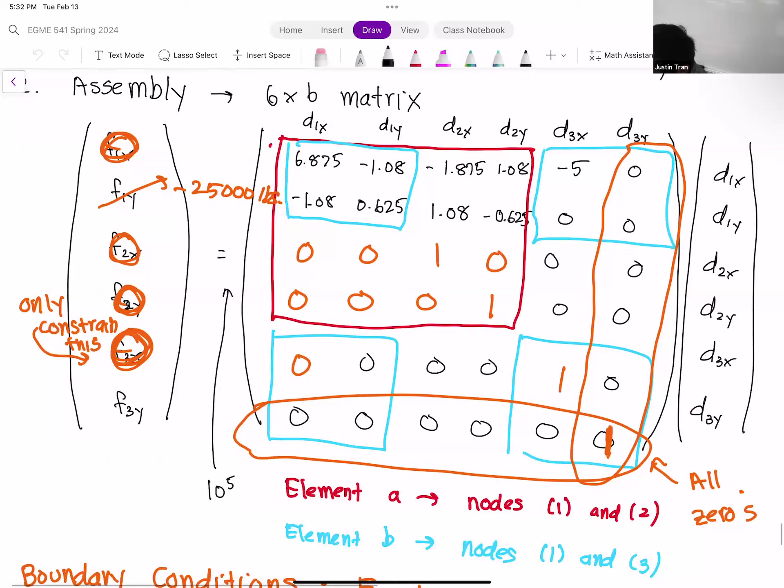Okay, so I did want to go back to the example from last time. Let me go through here, there's not much to write down, so I'm just going to jump back into the notes from last time. Let me erase this.

Okay, so last time we were doing this example here. We have the structure—it's just a 2-bar structure where we had one element angled up at a 30-degree angle and another element that's horizontal.

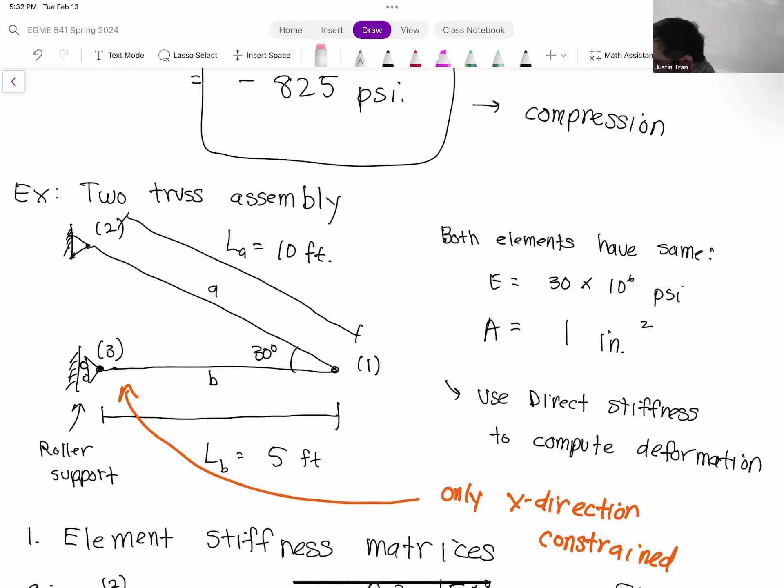I used this example for a couple of reasons. The first was to start a discussion on the conventions for the angles. Even though the angle given in the problem is 30 degrees, that's not the angle we actually plug into the element stiffness matrix a lot of the time. The angle you have to plug in is the one the element makes with the positive x-axis. So make sure you're computing your angles correctly.

The other reason I brought up this example was the global stiffness system. After you assemble all the element stiffness matrices and apply the boundary conditions, what can happen sometimes, not often, is that you get a row that's entirely zeros and the corresponding column is entirely zeros as well. Let me highlight it again so you can see—this entire last row here is zeros, and this column is all zeros as well.

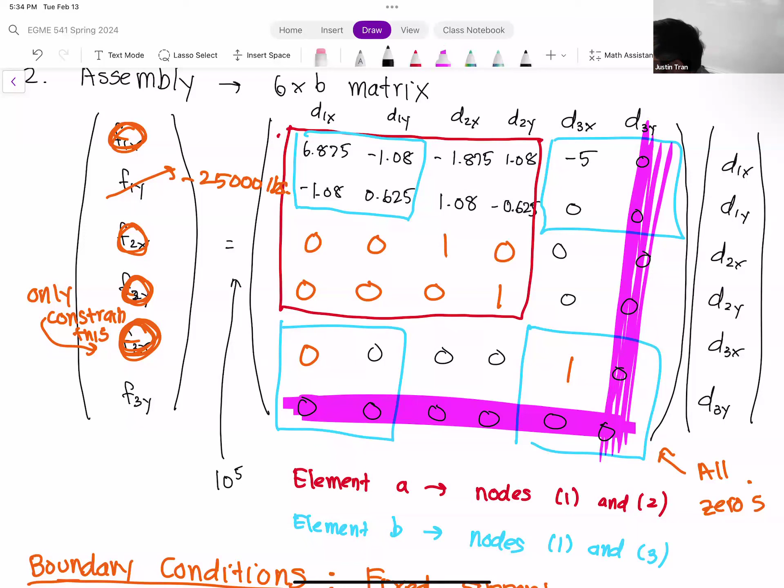So this is a singularity, and what this basically means is that our structure is not stable. A few people have actually noticed this as well. If you actually had this structure in reality, with a fixed pin up here but this one being a roller, and if you pull down on this—apply a force on the end, or even without a force, just let it fall through its own weight—

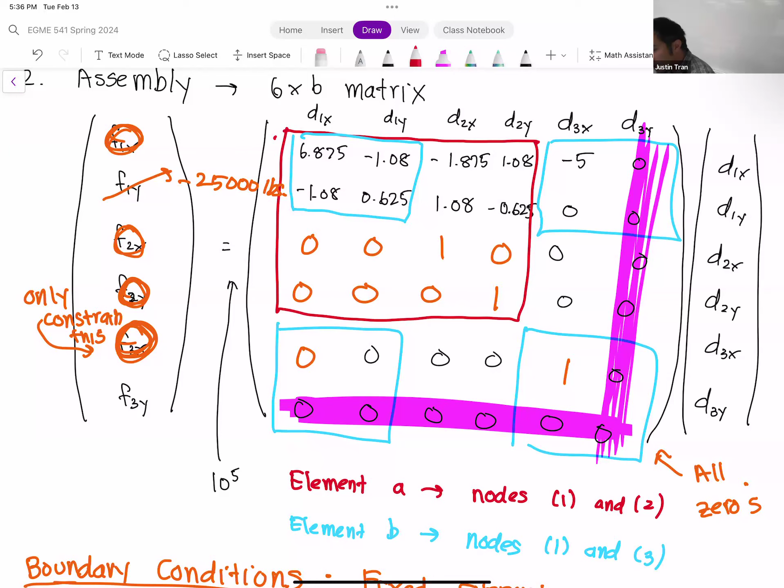The way you do that is you can transform one of these supports from a roller support to a fixed support. To do that—sorry, I have too many colors going on, it's hard to see—to artificially constrain the structure more, you would basically change that last row, that last diagonal entry, to be a 1. By changing this to a 1 here, we are artificially constraining the structure.

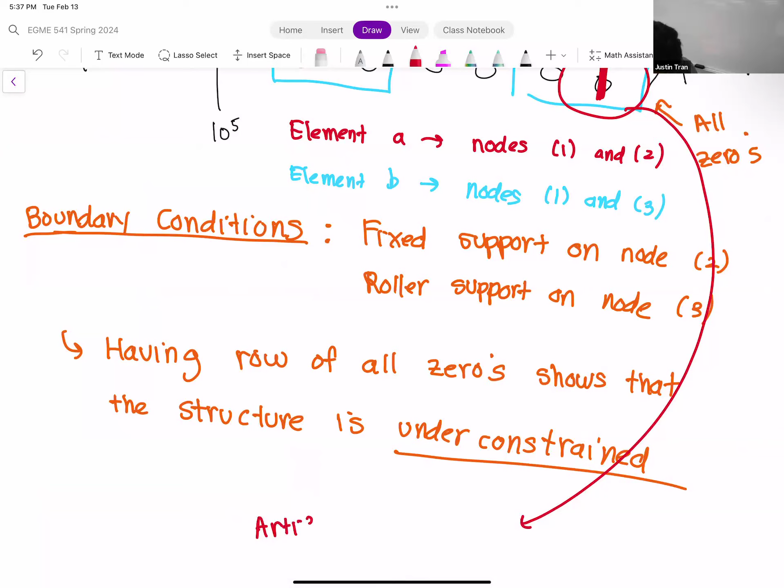Right, so that's what you would have to do. So only by doing that can you actually solve this system for the deformation in this case.

But the reason I bring this up is that this is actually quite a common problem in FEA in general. And so when you're using ANSYS or when you're using any kind of commercial software, your software is going to be checking for if you have enough constraints on the structure. And it's not that uncommon for you to have a situation where you under-constrain your simulation as well.

Question: so F3Y will be 0? Yes, F3Y will also be 0.

And so you're going to be in a situation where you also need to put additional constraints on your structure in order for your simulation to run. And so the way ANSYS basically tells you this is that it will give you something called a solver pivot warning. That's basically your indication that you need to add more constraints to the structure.

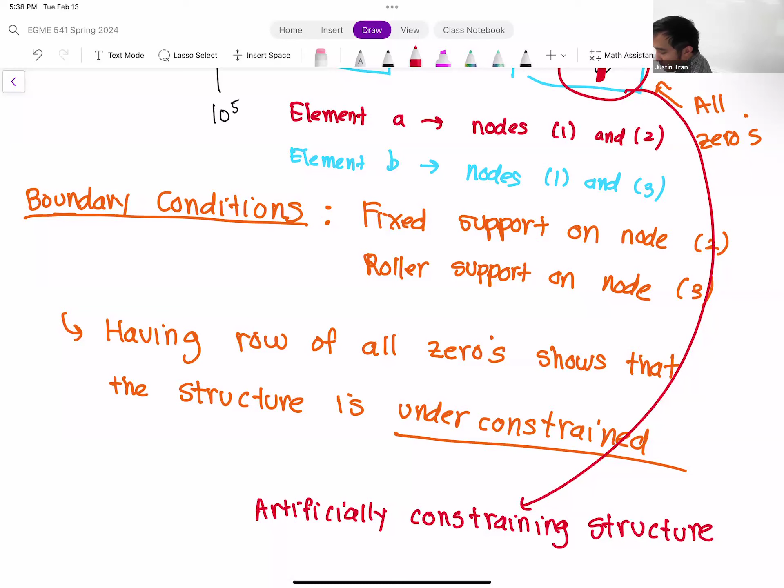And mathematically, this is essentially why. The reason ANSYS gives you that error is because it's creating a linear system here, and it's not able to solve for a solution because it either has a row or there's multiple rows of all zeros, and it's not able to invert the matrix to give you your solution.

So you either need to go back to your original geometry and try to come up with where it makes sense to add a fixed constraint or to add more constraints. Or is there something else wrong? Is there some other issue with the boundary conditions that I need to address?

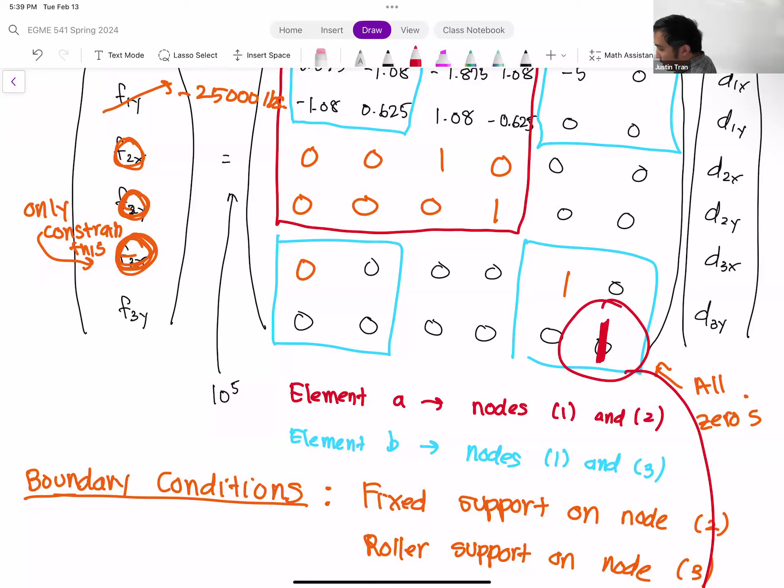And so there's not really a fix-all kind of solution to that. It's really kind of situation dependent, but this does happen quite often in FEA, and this is kind of the mathematical reason why it does that.

So I wanted to bring that up. I'm going to try not to give you any more problems like this on the homework where you have to artificially constrain it. But in situations like that, that's essentially what you have to do. Any questions on this?

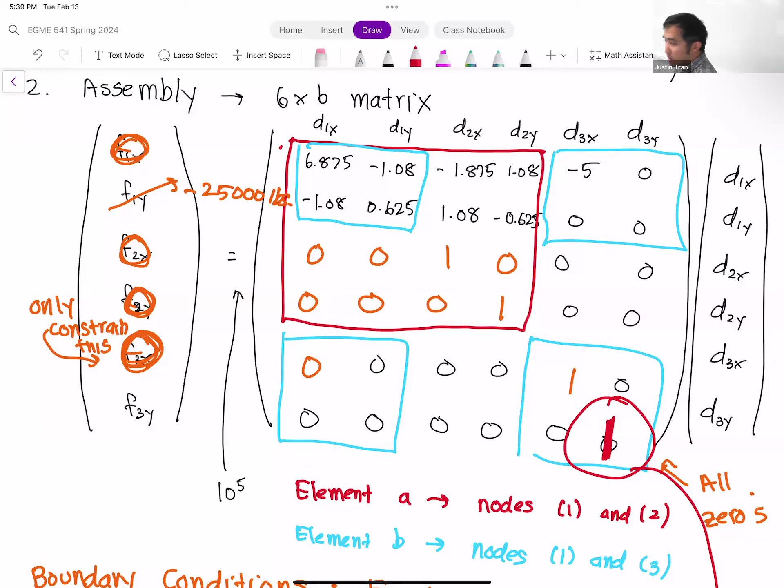Okay, all right. So let's jump to beams then.

And so we're going to talk about the application of beam elements in the direct stiffness method. So in a nutshell, beam elements are structural elements that are able to support transverse and rotational deformations.

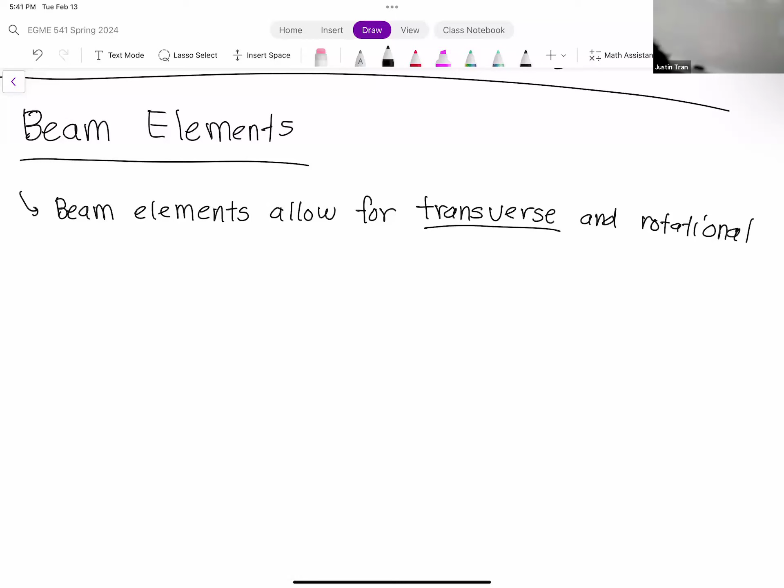So what do I mean by transverse and rotational deformations? Let me go ahead and draw a beam element for you here. In a lot of ways, a beam element is kind of opposite of a truss bar. A truss bar, if you remember correctly, is only capable of axial deformations.

Those are deformations that are parallel to the element itself. Beam elements allow for deformations in basically every other direction, so transverse deformations. Let me call this D1Y and D2Y. Transverse deformations are deformations that are in the direction perpendicular to the element.

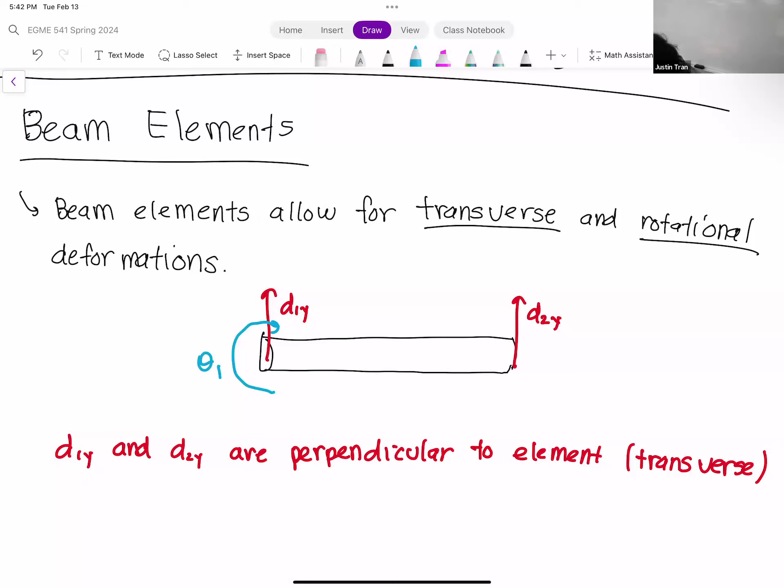So any kind of bending that's associated with an element comes from transverse deformations. On the flip side, rotational deformations we usually indicate with an angle: θ1 and θ2. These are the rotational degrees of freedom, and what they indicate is a change of orientation or change of slope of the element at those locations.

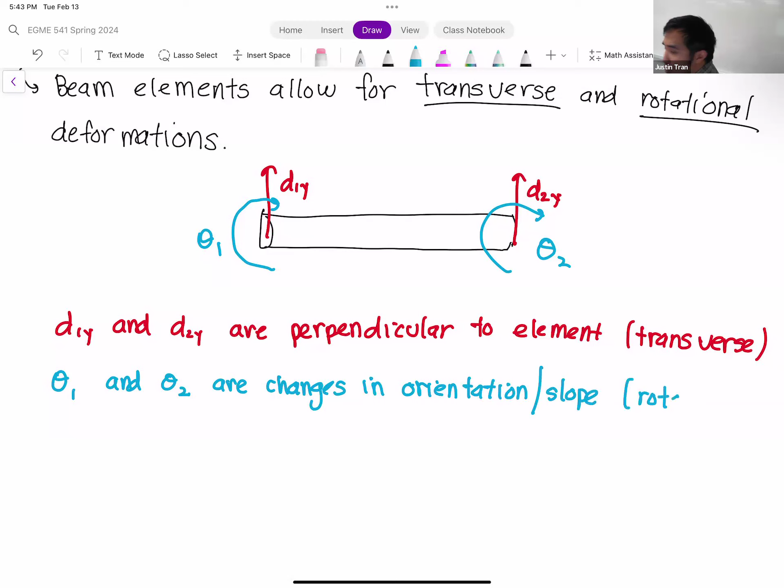So we are now going to be adding these two modes of deformation to our direct stiffness approach. So in contrast...

Truss elements only allow for axial deformation. So beams are basically everything else.

All right, so with the introduction of beams, this kind of opens up our repertoire quite a bit in terms of the types of structures that we can analyze. Because with truss structures, for the most part, we're mostly limited to kind of triangular structures, because the structure has to be arranged in a certain way where most of the forces and most of the deformation is going to be down the barrel of the element.

But now that we're introducing transverse deformations and rotational deformations, this opens up the possibilities of the type of structures we can actually do. But it also brings with it a completely different element stiffness matrix.

Okay, so that's going to be the focus of this week: what's the element stiffness matrix for these beams? How do we incorporate that into our direct stiffness method, and then do a few examples to hammer that home. All right, any questions on this so far?

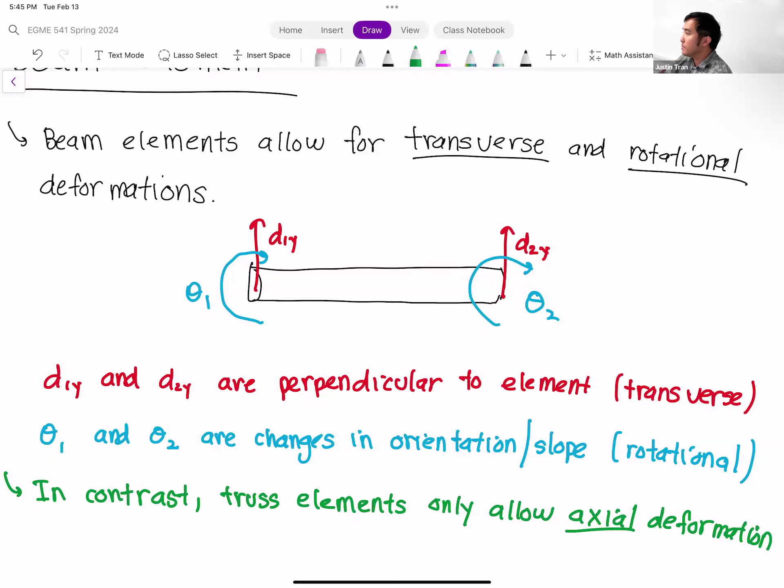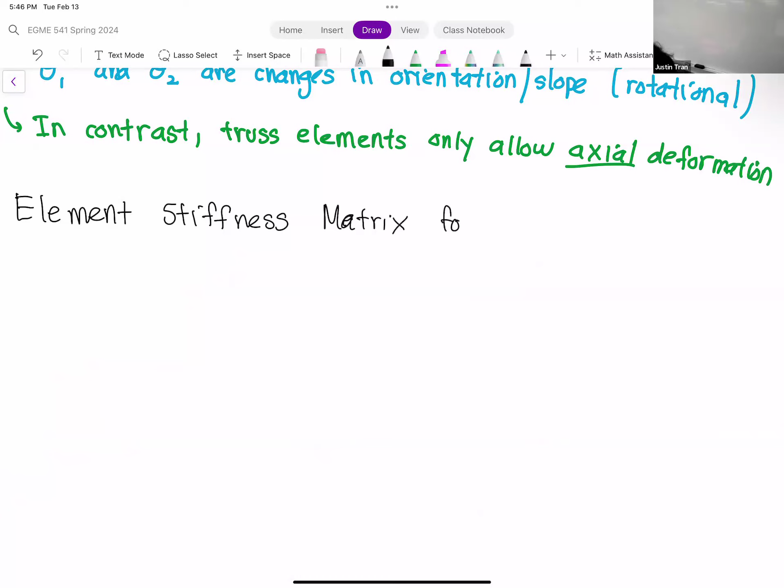Okay. All right. So let's take a look at the element stiffness matrix for a beam.

All right, so first thing I'll note here is that because for a beam we're considering both transverse and rotational deformations for two nodes in a beam, that means we're going to have 4 degrees of freedom per beam element. So that is D1Y, theta 1, D2Y, and theta 2. And so what that means for our element stiffness matrix is that it's going to be 4 by 4.

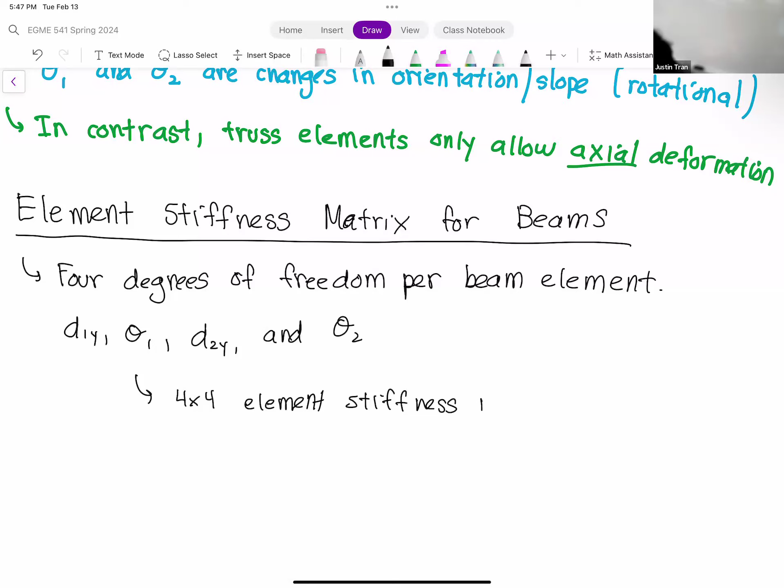All right, so in particular it's going to look like this. On one hand you're going to have the forces, so you're going to have Fy1. For the rotational degrees of freedom, instead of a force we're going to have a torque, or a moment, so it's going to be M1. So our forcing vector looks like Fy1, M1, Fy2, M2. This is going to be equal to our element stiffness matrix, which is yet to be determined, times dy1, theta 1, dy2, theta 2.

All right, question: don't we consider axial deformation in beams? So for now we're going to ignore the axial deformation. We are going to bring it back - the next topic after this is going to be frame elements, and frame elements will consider axial deformation, transverse deformation, and rotational deformation all at once. But those problems are massive, because with that you'll have 6 degrees of freedom per element, and your element stiffness matrix is going to be 6 by 6, so it gets quite nasty. But for now we're going to ignore the axial deformations.

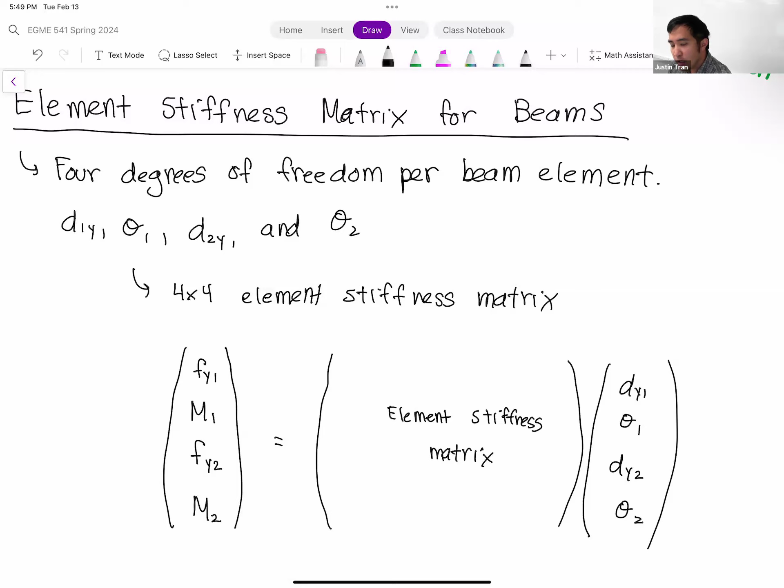Okay, so now the question is, what are we going to put inside this element stiffness matrix?

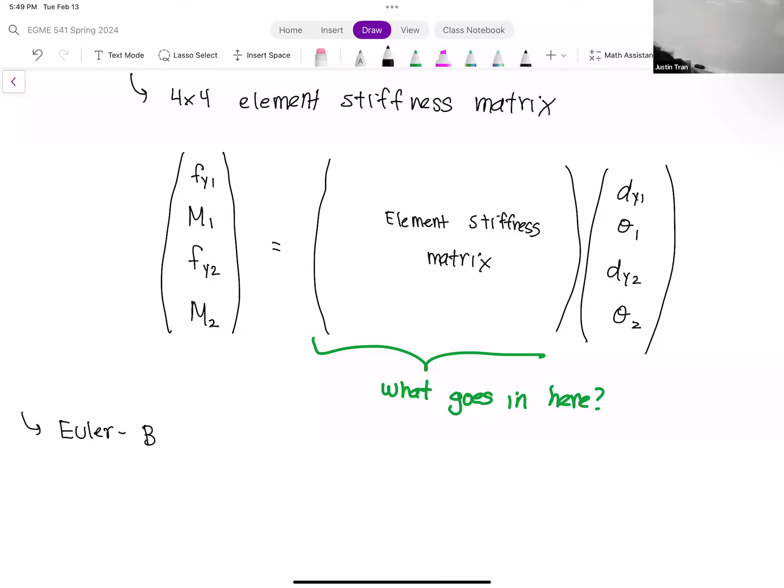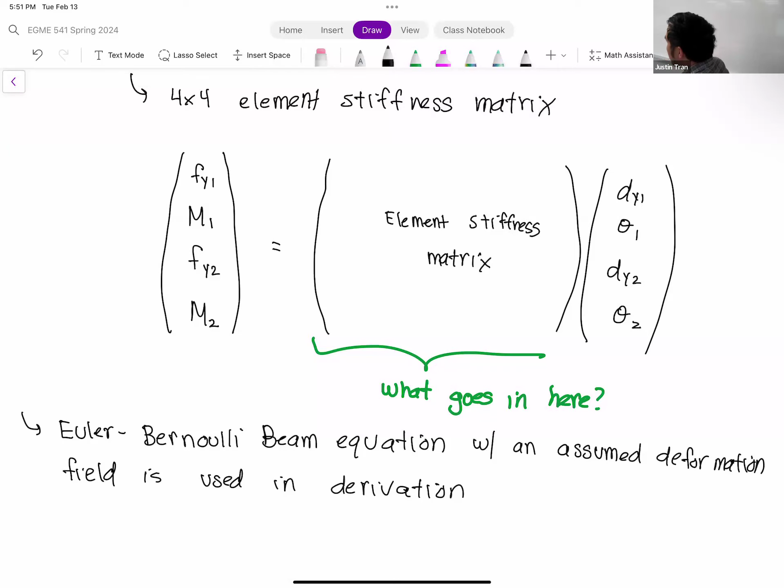All right, this is something I'm going to largely skip, so I'm not going to give you the full details of this derivation. It is in the lecture notes, so if you're interested you can check it out there. But in a nutshell, we're basically going to be using the Euler-Bernoulli beam equation. So what we do is apply it onto a beam element with two nodes, with a certain deformation field. If you apply that and go through the derivation, that will give you your element stiffness matrix. The nature of this derivation is a little different than how we derive the element stiffness matrix for a spring and for a truss - this one actually utilizes the differential equation for a beam quite a bit. But just for the sake of time, I want to make sure I get to some examples today, so I'm going to largely skip it, and just give it to you.

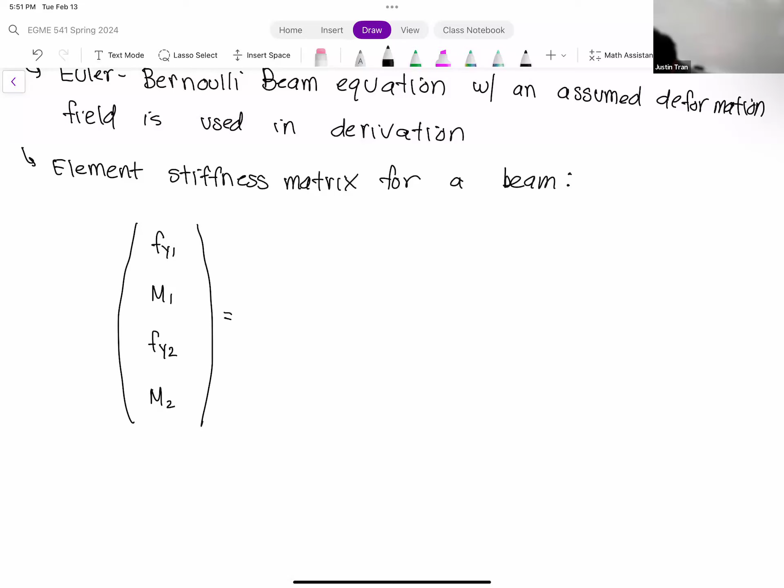And so the element stiffness matrix for a beam looks like the following: Fy1, M1, Fy2, M2 is equal to - in front here we have a factor that multiplies the whole thing, so we have EI over L cubed. This is multiplied by a 4x4 matrix, and so this is going to be 12, 6L, minus 12, 6L. That's the first row in the matrix.

So our same rules from before actually apply here too. All element stiffness matrices are symmetric. So as soon as you write the first row, you can take that first row and write it into the first column as well. Let me go ahead and do that.

So our first column here is going to be 12 up top, then 6L, minus 12, and 6L. Next row, we already have the first entry, which is 6L. The diagonal entry is 4L squared, and minus 6L, 2L squared.

Let me do the same thing and write those entries into the second column. All right, in the third row here, we have a 12, minus 6L. Once again, we're gonna rotate that down, so we have a minus 6L in the fourth row in the third column. And then the very last entry is gonna be 4L squared.

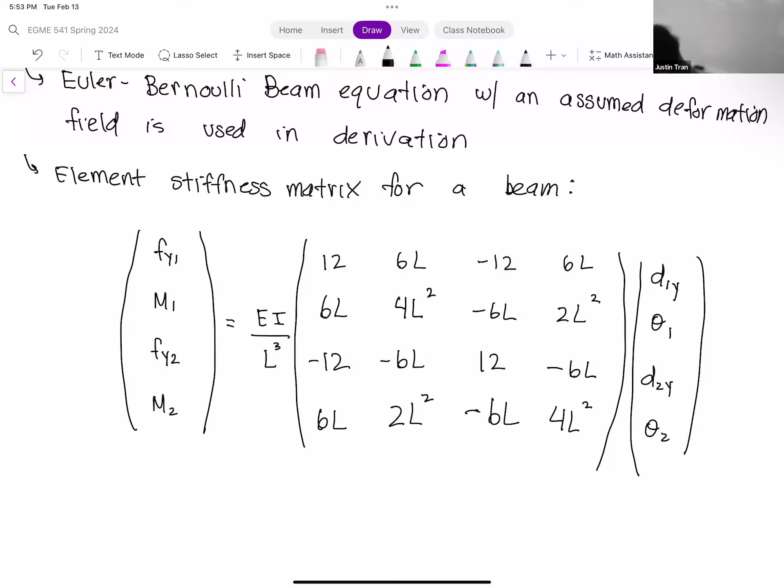And of course, this is multiplied by the deformation vector d1y, theta 1, d2y, theta 2. So that's the element stiffness matrix for a beam. Any questions on this so far?

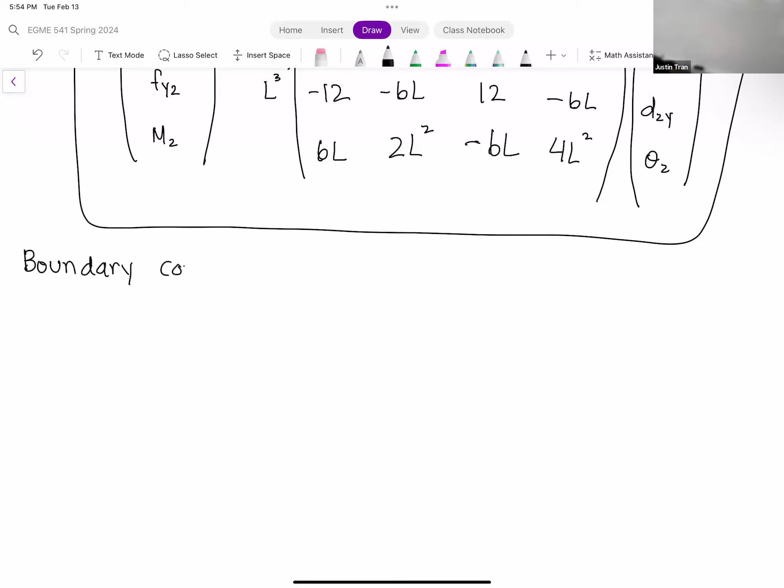Okay, so before we jump into an example, let's talk about constraints a little bit more, or boundary conditions. With the last example that we did with trusses, we were introduced to the concept of a roller support versus a pin support. We're going to expand on that a little bit more because now we have a rotational degree of freedom. We need to talk about how the different constraints affect that rotational degree of freedom, as well as the translational ones. So there are three types of constraints.

And honestly, the difference between some of these is not going to be relevant until we get to frame elements, which is the next thing.

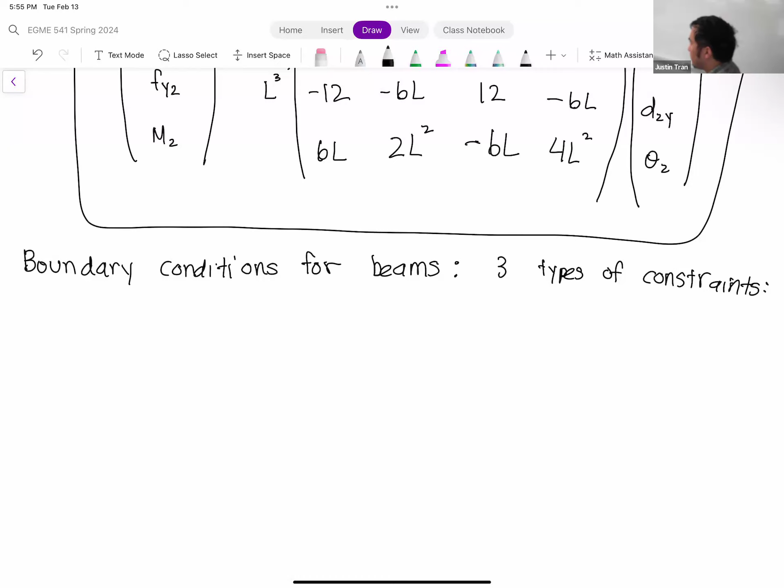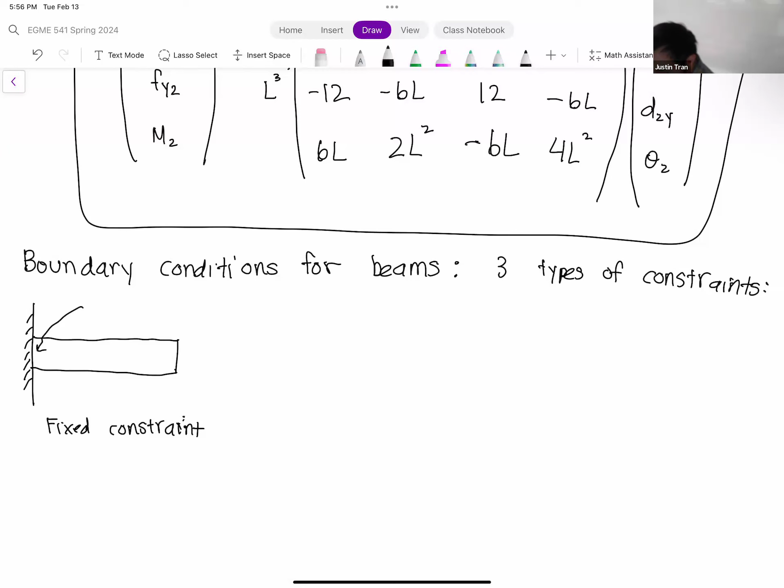All right, so the first type of support that we have here is called a fixed support, or fixed constraint. Visually, what it looks like is that you have a beam, and that's literally kind of just stuck inside a wall, right? And so you have a wall that's basically attached to that. So the fixed constraint refers to this end right here on the left. We have the beam kind of stuck inside the wall. And so this is the most powerful type of constraint, and so all degrees of freedom are constrained here. So we have dx is equal to 0, dy is equal to 0, as well as theta is equal to 0 as well. So it allows no degrees of translation and no degree of rotation.

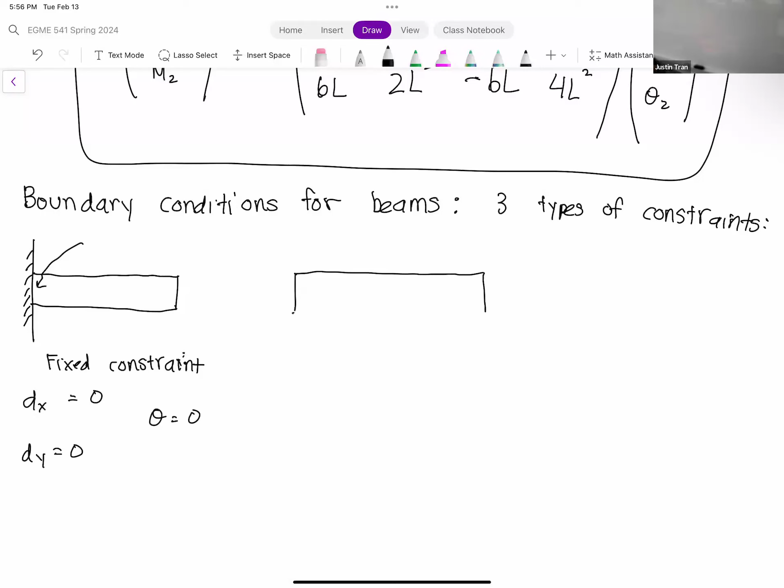All right, so next is the constraint that we've been mostly using in our truss problems. I think in the past I've called this a fixed constraint. Well, for trusses, it effectively is a fixed constraint. But I want to make the distinction between this and a true fixed constraint, which is on the left. So whenever you have that little triangle symbol and that triangle is kind of directly attached to the element, and that triangle is kind of fixed to the ground, this is something called a pin constraint.

And so a pin constraint is going to constrain the displacement. So we're going to have dx equal to dy equal to 0. But the pin constraint is not going to constrain any of the rotations. We're going to have theta be free here. So at a pin constraint, the structure is free to rotate however it pleases.

Okay, and so the last type of constraint, this is the one that we talked about last time, is a roller. And so a roller constraint visually looks like this. It's going to basically look like a roller skate, basically a constraint with wheels, and the wheels are going to be on a wall or something like that.

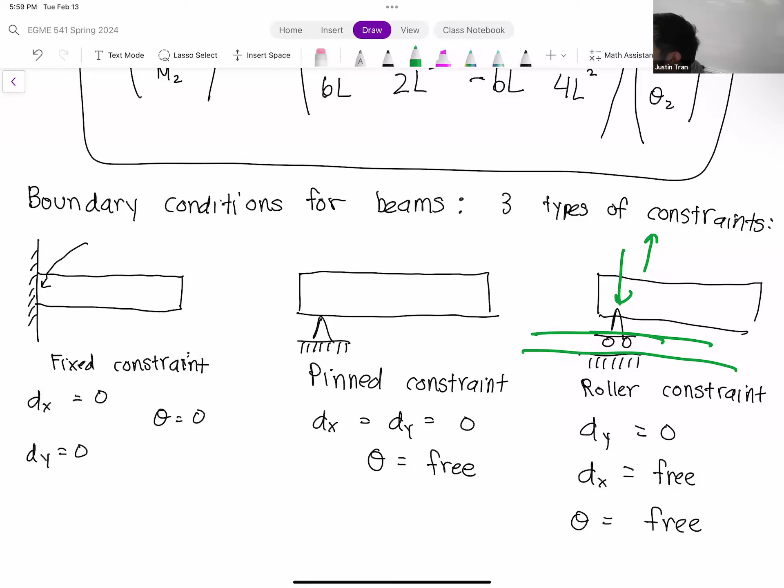Shouldn't that make the angle 0 also? No, it's free to rotate as well because the beam here is still pinned right here. And so the beam is free to kind of rotate up and down this way. The track is only there just to prevent any kind of y deformation.

All right, any other questions on this? Okay, so this will become a lot more relevant when we do frame elements, but I thought this would be a good chance to introduce this here.

Okay, so let's do a fairly simple example, just to kind of see how all of this kind of fits together. Okay, so let's consider this 2-element beam.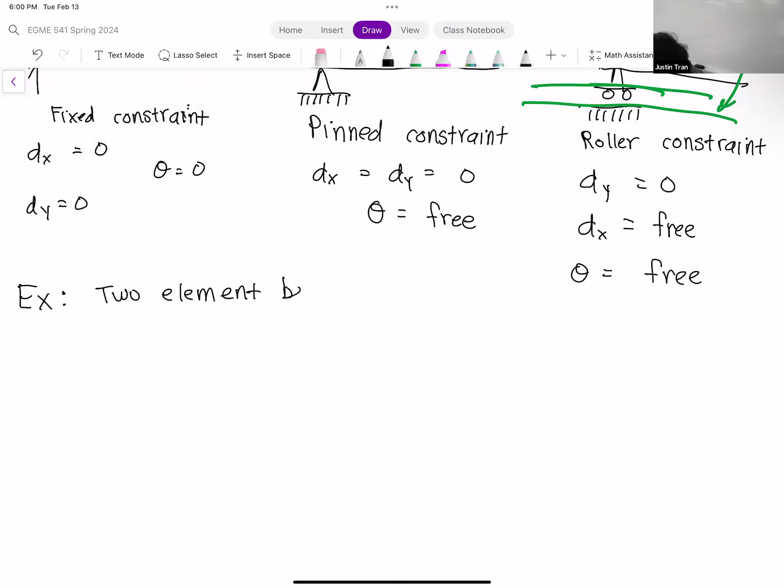All right, so on one end we're going to have a fixed support, and on the other end we're going to have a pin support. Okay, so we'll call this element A, we'll call this one element B. You have node 1 attached to the wall, node 2 in the middle between the two elements, and node 3 that's on the end.

All right, so we're going to do this one purely symbolically. I'm not going to give you any numbers for this, but it's just to kind of show you how all the matrices are set up.

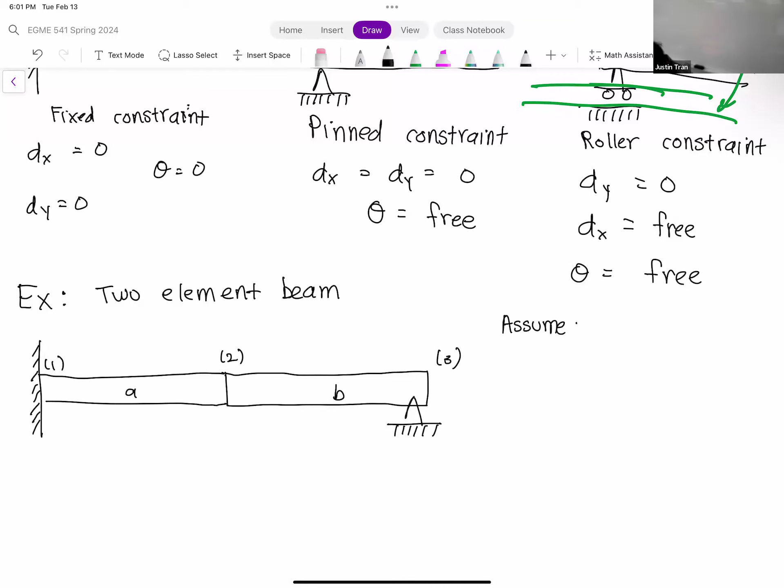All right, so let's assume that E and I are constant throughout. So we don't change any material and we don't change the cross-sectional area, the cross-sectional shape.

I wrote something down, I promise. It's the iPad that's crapping out.

Okay, I should have mentioned this earlier, but I always forget to do that every year. In the element stiffness matrix for a beam, the capital I that's there is the moment of inertia, the moment of inertia of the beam cross section. So we have E and I constant throughout the beam, and we're going to consider these as pure beam elements. And so we're going to ignore any axial deformation.

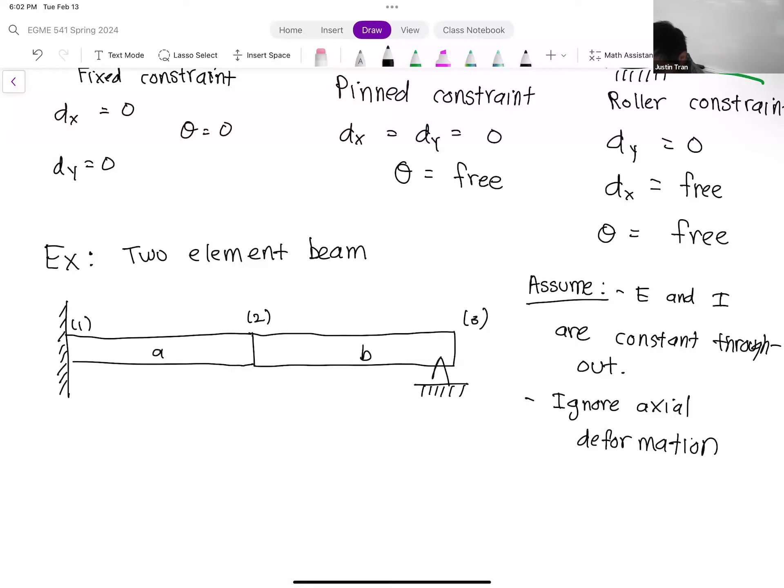All right, so let's talk loads. And so we have two loads being applied here.

So we have a downward load, a downward force of P being applied on node 2. And we also have a counterclockwise moment, or counterclockwise torque, of M being applied on node 2 as well.

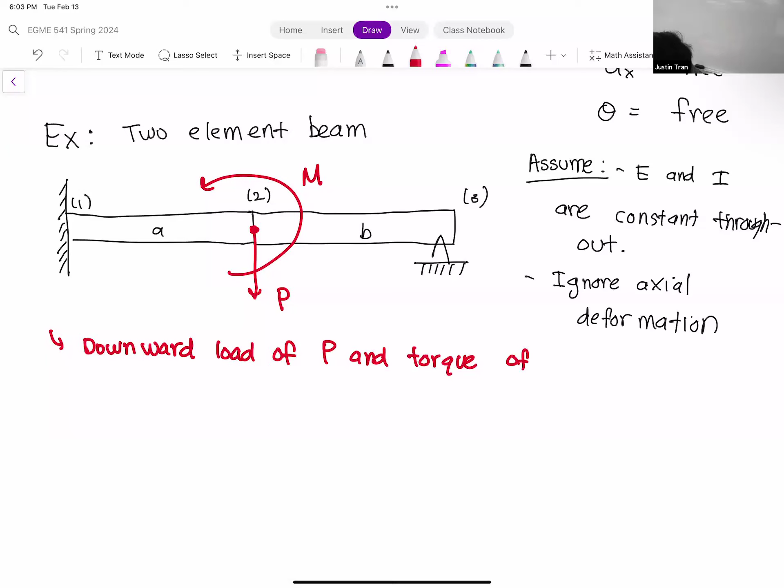Okay, so in this case we're not given any numbers, we're just going to do this all symbolically. And so for this one, all we're going to do is assemble the global linear system and apply boundary conditions.

All right, so it's a pretty straightforward direct stiffness problem. We only have two elements here, so we're just going to run through the motions pretty quickly. Any questions on just the setup for the problem?

Okay, all right, so let's go ahead and go through it. All right, so the first thing we need to do as part of the direct stiffness method is to write out the element stiffness matrices.

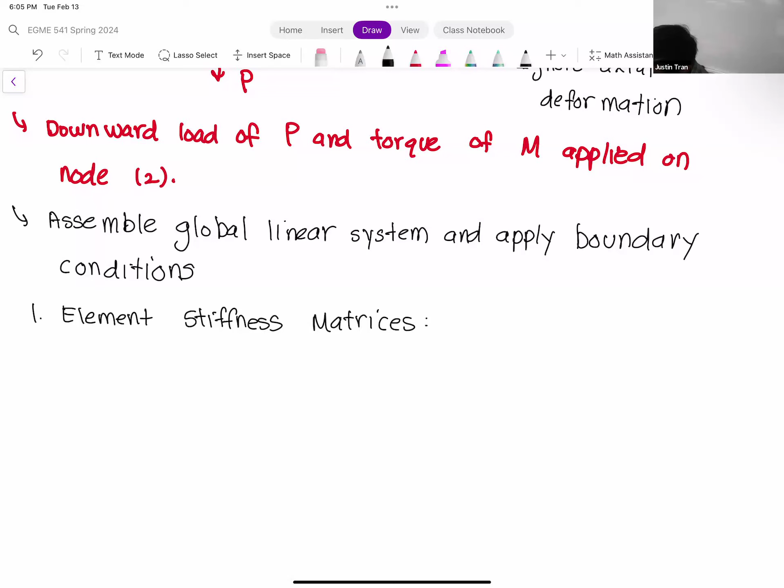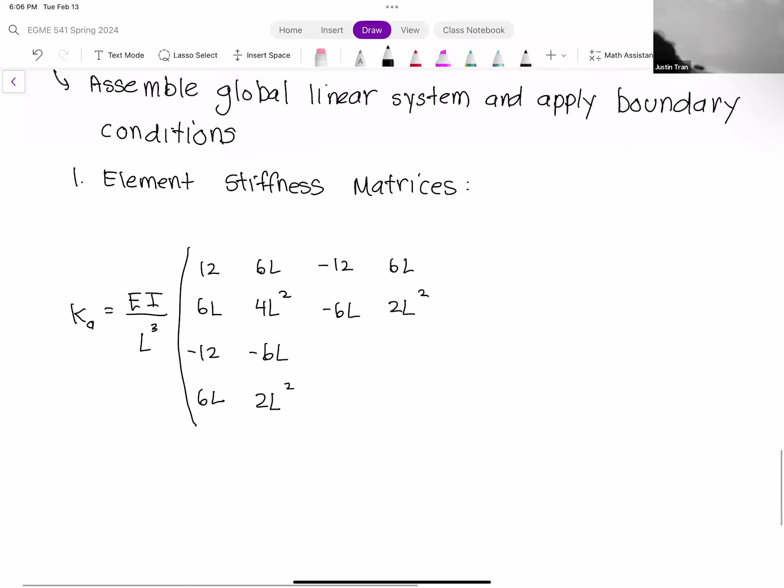All right, so we have the element stiffness matrix for element A. Since we're not given any numbers and we're given all of the properties here symbolically, I'm just going to write it down here. So for Ka, we have EI over L cubed multiplied by 12, 6L, minus 12, 6L — write that into the column — 4L squared, and then third row you have minus 12, minus 6L. And since element A here is connected to nodes 1 and 2, we have D1y, theta 1, D2y, and theta 2.

Okay, now we have element B. So element B, we have the same thing. So we have EI over L cubed — its properties are identical to element A, so we're just going to copy this straight over.

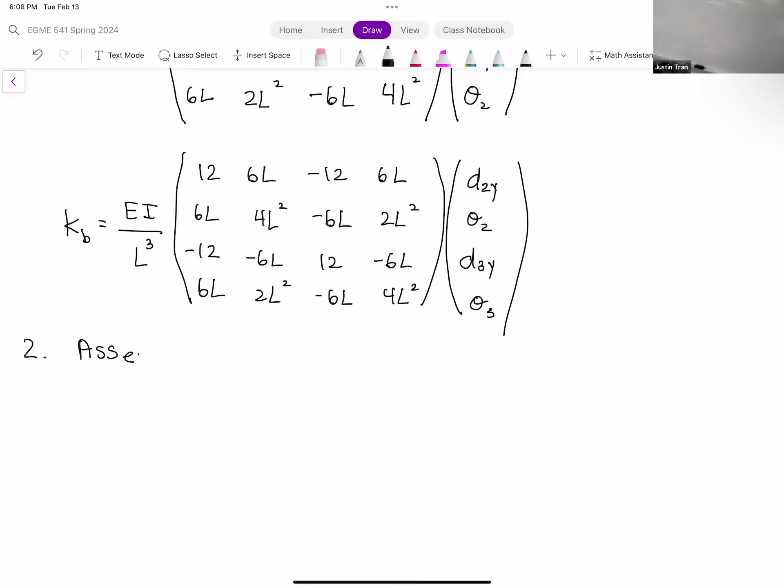Okay, so now that we've written out the element stiffness matrices, the next step is to assemble. So let's go ahead and do that.

Since we have 3 nodes here and each node has 2 degrees of freedom, that means our global stiffness system is going to be 6 by 6. So let me write in the forcing vector first, since we have F1y, M1, F2y, M2, F3y, and M3.

Let me add in our factor in front here, so we have the EI over L cubed. All right, so now we need 6 columns here. So we have a D1Y column, theta 1, D2Y, theta 2, D3Y, theta 3.

All right, so this one's pretty straightforward. We're just gonna enter these in here, right? All of these elements are contiguous with each other. So this is gonna be element A.

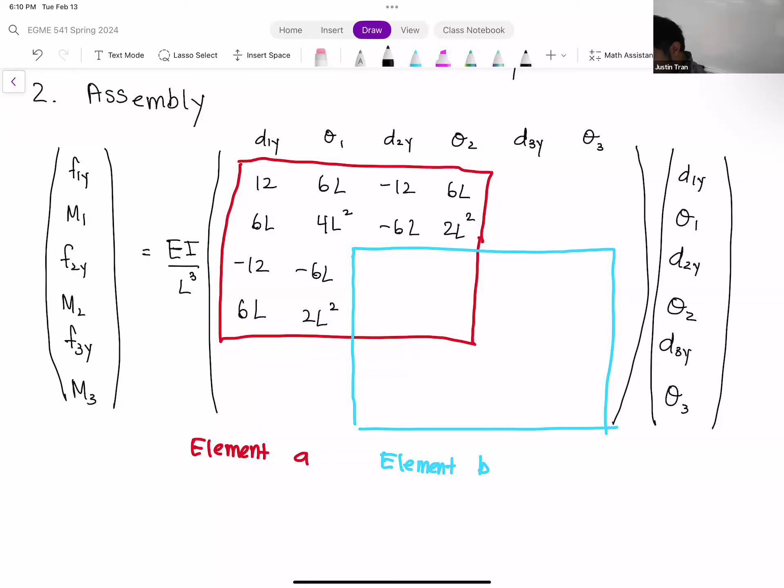All right, now we have the overlap region. We're going to have some things cancel out and some things add together. So we can have a 24, 0, 0, and then 8L squared. That's what you get when you overlap the bottom right-hand corner of the stiffness matrix with the upper left-hand corner of the other one. And then everything else here is going to be the same as up there. So you have minus 12, 6L.

Okay, and then of course, everything that's not in a box, we're just going to put a 0 there. As always, there's a lot to write down, but as you start to do more of these, you kind of start to get into a rhythm of doing these things.

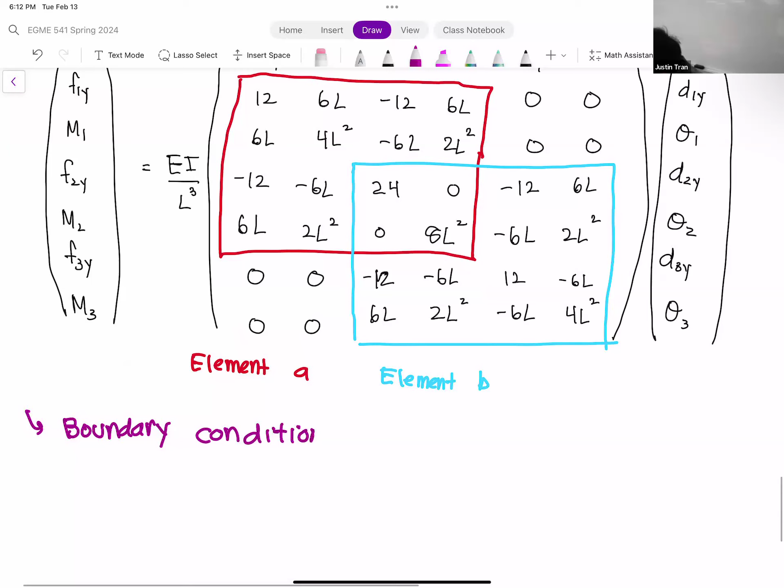All right, so everything we've done up to this point has been pretty standard. That's just our standard direct stiffness method. The only caveat, of course, is that we're using beam elements now, so with the different element stiffness matrix. Here's where the wrinkle gets a little bit interesting. So let's add our boundary conditions here.

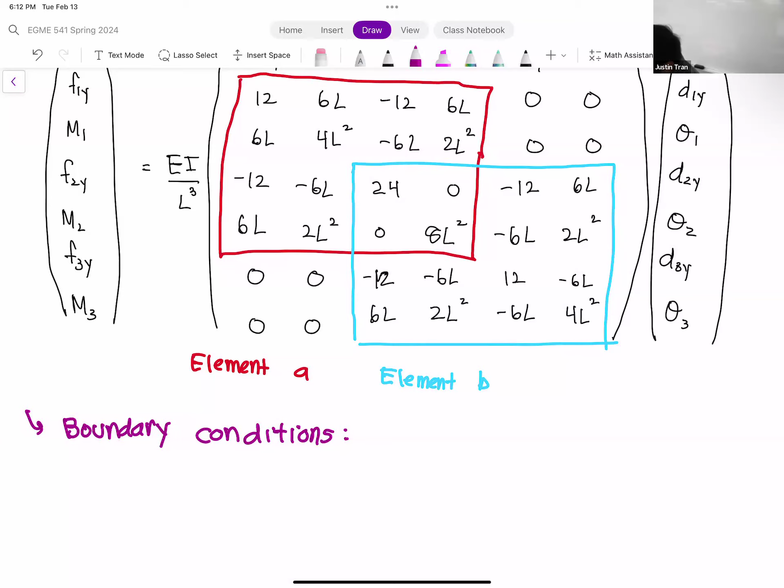All right, so if we go back to the diagram for this problem, we can see from the diagram here that we have a fixed support on node 1, whereas on the right, we have a pin constraint on node 3.

So what does this mean? That means the degrees- so let's look back at our cheat sheet here in terms of how this affects our degrees of freedom, right? Remember, we're only considering beam deformation, so we're only considering transverse deformation and rotation.

Okay, so on the left-hand side for the fixed constraint, this is pretty easy. A fixed constraint is going to eliminate absolutely everything. So this means that d1y and theta 1 are both 0.

Whereas for the pin constraint, it's gonna restrict the deformations. We have d3y, and d3y is gonna be 0, but theta 3 is gonna be free. Remember, what free basically means is that we're gonna leave that entry in, we're gonna leave that row in the matrix unloaded, so we're not gonna make any changes there. But we are gonna make changes to the d3 row, and we're gonna make changes to the d1y and theta 1 row.

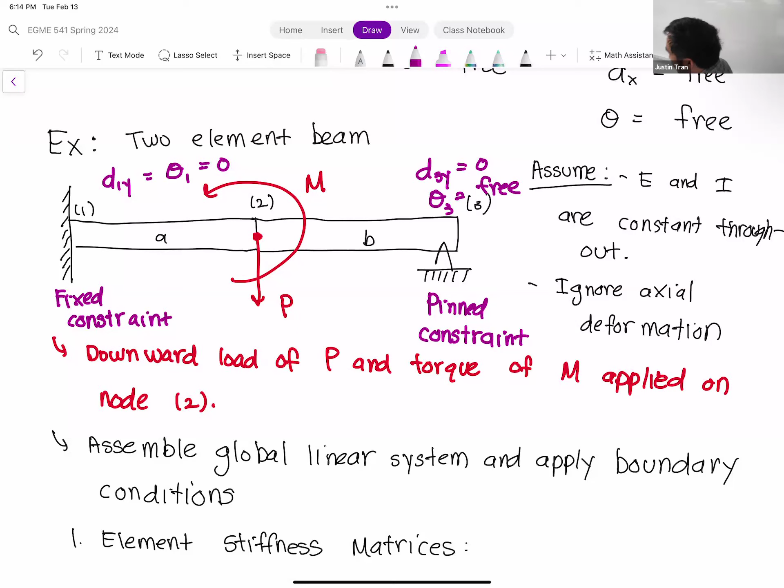Okay, so let's go ahead and make those changes to our matrix here. So first, let's apply the fixed constraint on node 1. That means this entire row, the first row, needs to be changed. The second row, which corresponds to theta 1, also needs to be changed.

Okay, so let me go ahead and do that right now. Remember, for constraints, we change every entry in the row to zeros except for the diagonal. So for the first row, it's going to be 1, 0, 0, 0, 0, 0. And for the second row, we're going to put the 1 on the second column, so we have 0, 1, 0, 0, 0, 0. And then similarly, we're going to put zeros out here, so F1y is 0 and M1 is 0 as well.

Okay, now let's do the pin constraint on node 3. Pin constraint means that d3y is going to be 0, so we need to change this entire row. But theta 3 is going to be free, so the very last row in the matrix, we're actually going to leave alone. We're not going to make any changes to that row.

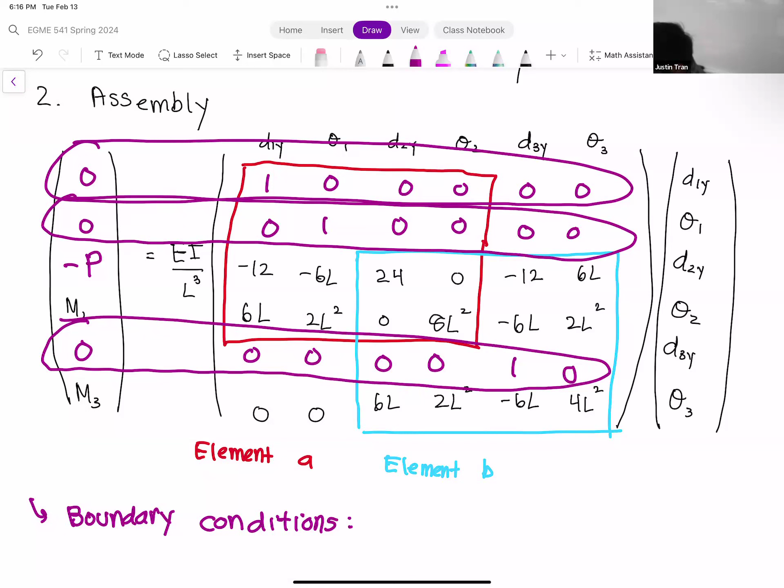Okay, now let's apply the forces. We have a force of P being applied on node 2 in the downward direction, so that means F2y is going to be minus P. And we also have a counterclockwise moment of M being applied on node 2 as well, so that means M2 we're going to replace with M.

And of course, the last thing we have to fill in here is M3. M3 is just any kind of rotational load or torque or moment being applied on node 3. We don't have any of that, so we're just going to turn this M3 into a 0.

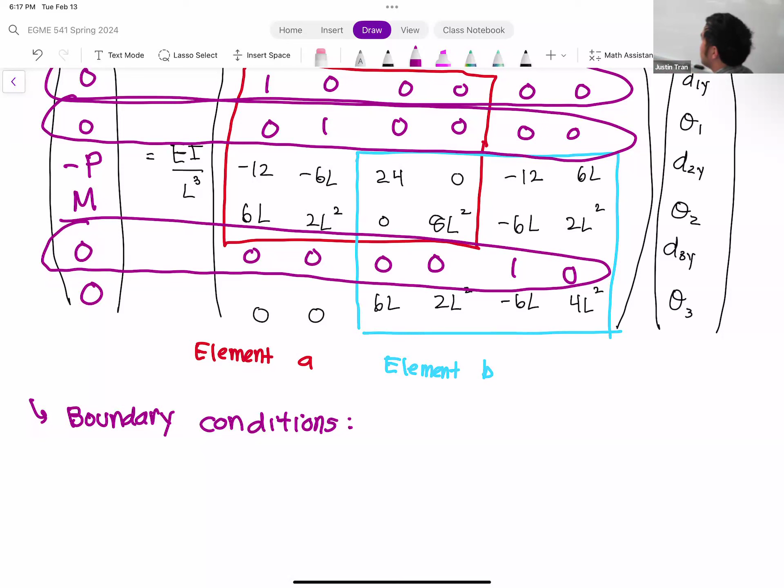All right, so that's beams, and there's really not much to it. You have to change your frame of reference a little bit because the deformations are in different directions, so our element stiffness matrix is going to be different. But besides that, we're following the same process as before: element stiffness matrix, assembly, boundary conditions. And then if you have numbers and access to a computer, you can solve it. But if not, just up to this point is fine.

All right, any questions on this?

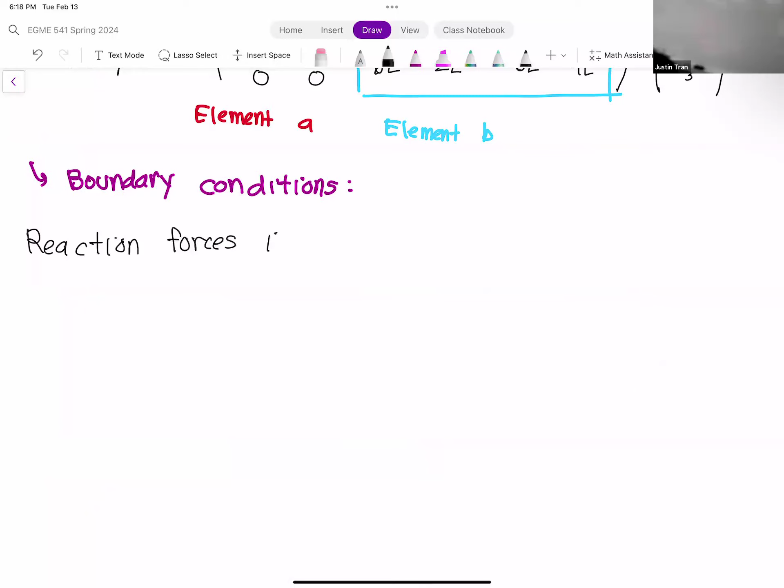Okay, so before we do the next example, I want to go over how to compute reaction forces from these direct stiffness solutions. What do I mean by reaction forces? Well, it's not explicitly stated in the problem, but all of the problems we're considering here are static situations. And when you have a static situation, that means if you were to sum up the total number of forces and the total number of torques in each direction, they would all have to sum up to 0.

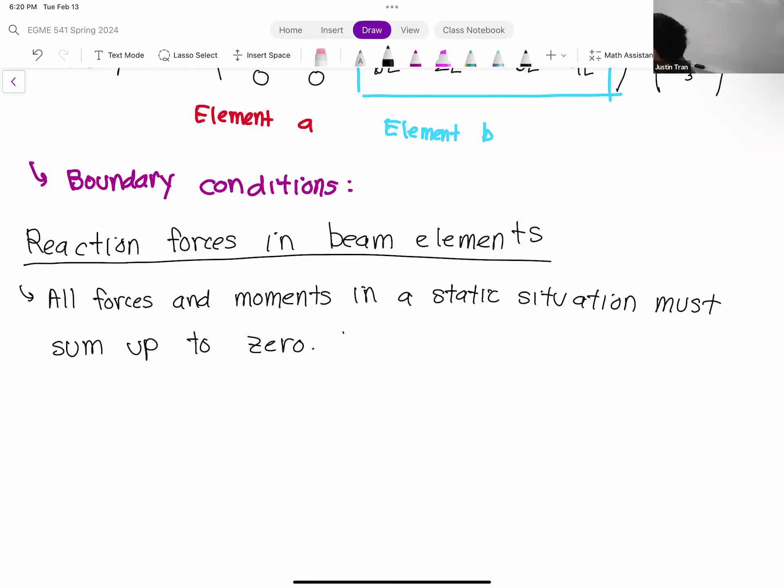So what that means is that when we have a structure like we have, and we're applying external forces on it, there actually are additional forces being applied to make sure we reach static equilibrium. Where do these forces come from? They actually come from the constraints. The forces applied on the constraints that are needed to achieve static equilibrium, we call those reaction forces.

So even though it's not explicitly stated, and even though we didn't actually compute it, the fixed support and the pin support in the previous example, those supports or constraints are applying forces onto our structure to balance out the external forces.

All right, and sometimes this is useful. Sometimes you actually want to compute these reaction forces, because often these reaction forces can tell you, if your structure is being held up by certain constraints, which constraints are most vulnerable to failing.

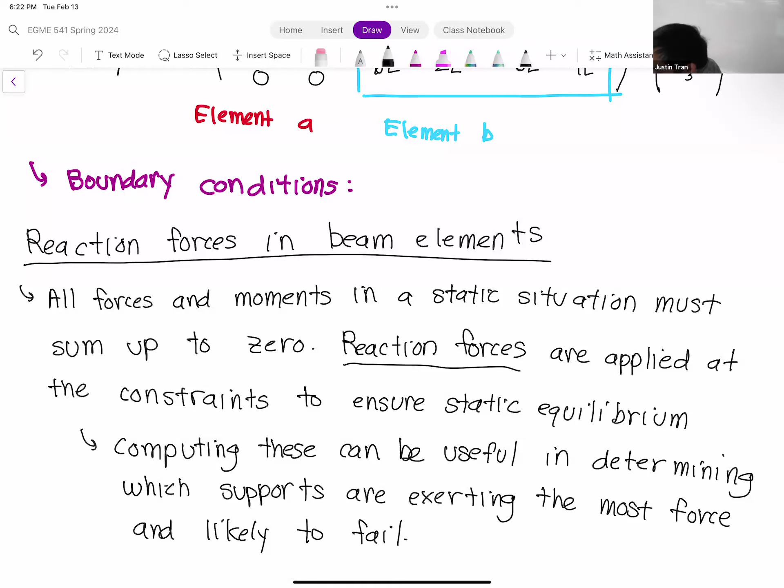And the lucky thing is that we can actually compute these from our direct stiffness solutions. So to compute the reaction forces in any direct stiffness situation, this can only be done after you solve for the deformation solution.

So after you compute the deformation solution, what you need to do is multiply it by your global linear system, the one that you had before you applied the boundary conditions.

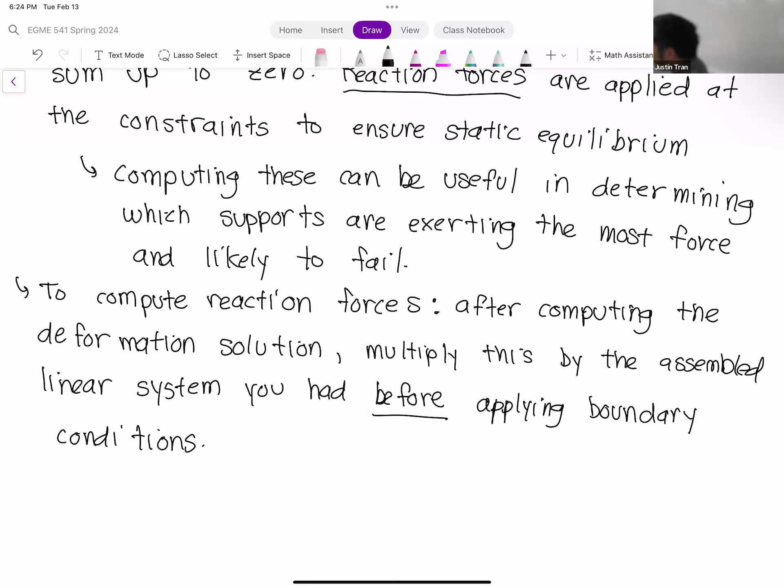All right, so basically at the end of step 2, after you do the element stiffness matrices and assemble them all together, that's the global linear system I'm talking about. So the one you had before you applied the boundary conditions, if you multiply that by your deformation solution, you're going to get a vector of all the reaction forces. We'll talk about that in the next example. All right, are there any questions on this before we jump into that example?

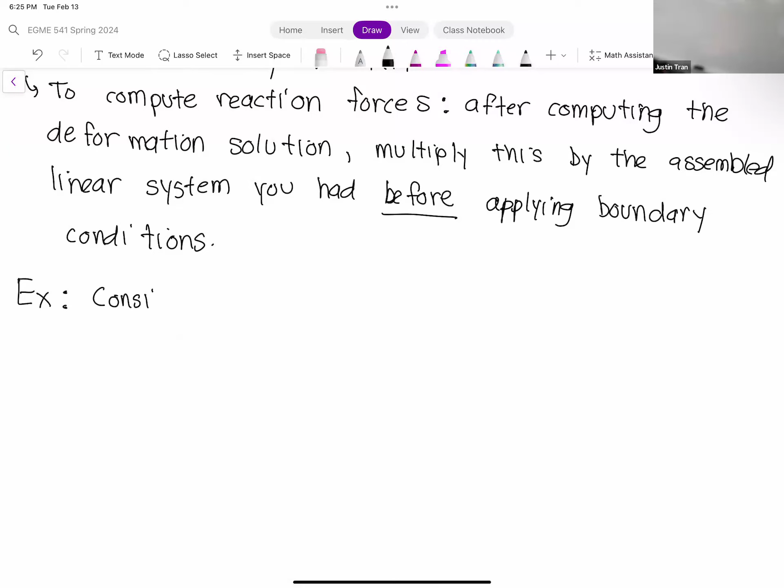Okay, all right, let's do one last example for today before we wrap it up. This example is interesting too because it incorporates a spring. Okay, let's consider again a 2-element beam. It's going to look very similar to the one we did in the geometry of the last example, except on the right, we're going to replace the pin support with a spring.

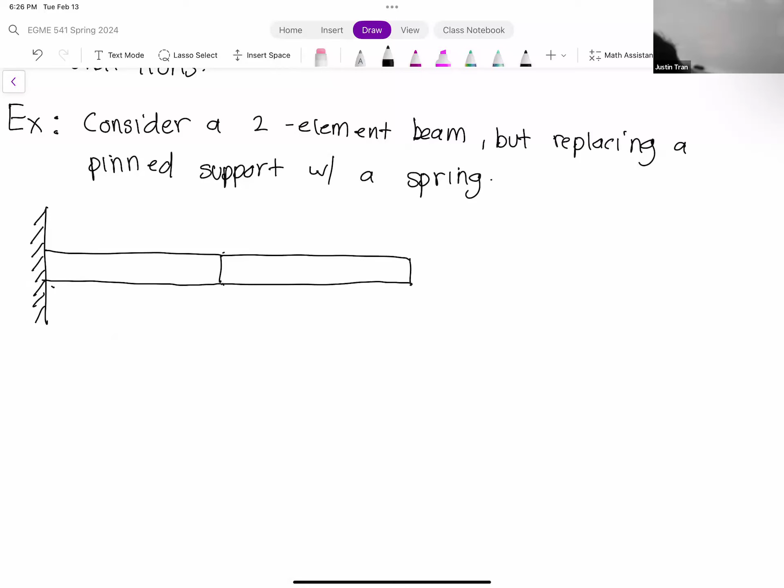Okay, so we have our 2-element beam here. So we have elements A and B. The left side of element A is fixed into the wall, just like before. So we have node 1, node 2, node 3. And on the right side here, we're going to have a spring that's supporting this. And so this spring here is going to be an additional element, we'll call that element C.

All right, so let's get some properties here. And I actually have some numbers for you this time so you can visualize it. Each of these beams we're going to say has a length of 3 meters.

Some of the other parameters for the problem, we have the Young's modulus for the beams. The Young's modulus for the beams is 210 gigapascal. The moment of inertia of the cross section is going to be 2 times 10 to the minus 4 meters to the 4th. And our spring constant for our spring, so this is the spring constant for element C, this is going to be 200 kilonewtons per meter.

Okay, and for the loads. All right, question: rotational deformations will result in orientations of the element different from what we have for the problem.

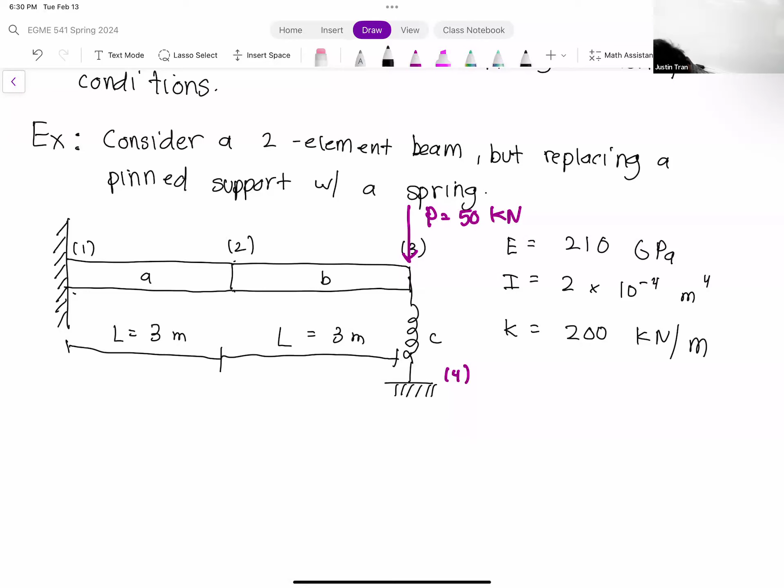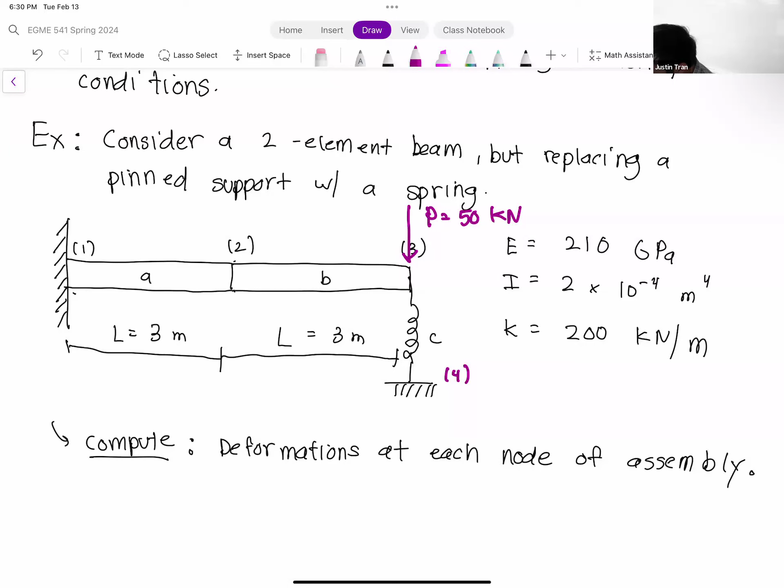Okay, and so for this problem, let's use the direct stiffness method to compute the deformations at each node of the system. Oh, and then afterwards, we're also going to compute the reaction forces. So I guess actually let's include the ground here because we need to compute the reaction forces here. So that means we're going to compute the reaction forces at node 1 and at node 4, because node 4 is going to have reaction forces as well.

Okay. All right, but that's the last thing that we're going to do.

Let's go through our direct stiffness methodology here. Let's start with the element stiffness matrices.

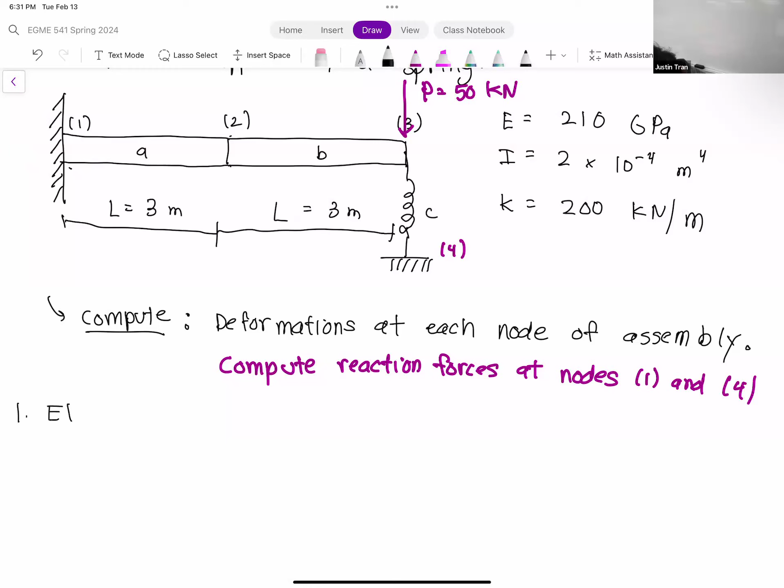Let's start with the two beams. I'm going to start doing these symbolically, because plugging in the numbers now—you can do it if you want, but it's usually a little bit easier to do at the end.

For element A, we have EI over L cubed, and our usual spring beam element stiffness matrix: 12, 6L, minus 12, 6L, 6L, 4L squared, minus 6L, 2L squared.

Element A here is connected to nodes 1 and 2, so we have D1Y, theta 1, D2Y, theta 2.

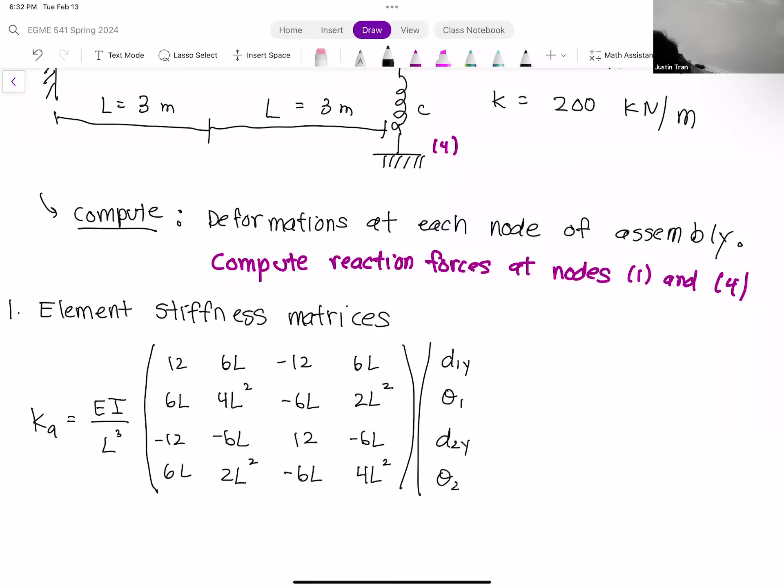KB is going to be identical—it has identical properties as beam A. The only difference is that element B is connected to nodes 2 and 3. So you have EI over L cubed, 12, 6L, minus 12, 6L.

Okay, so we wrote those pretty quickly. Element B is connected to nodes 2 and 3, with the same entries as KA.

And then we have the element stiffness matrix of element C. Element C is our spring. Technically speaking, if you look at the spring here, it's a vertical spring, so you can easily do this with a 2D truss system—treat it as a two-dimensional spring rotated up 90 degrees.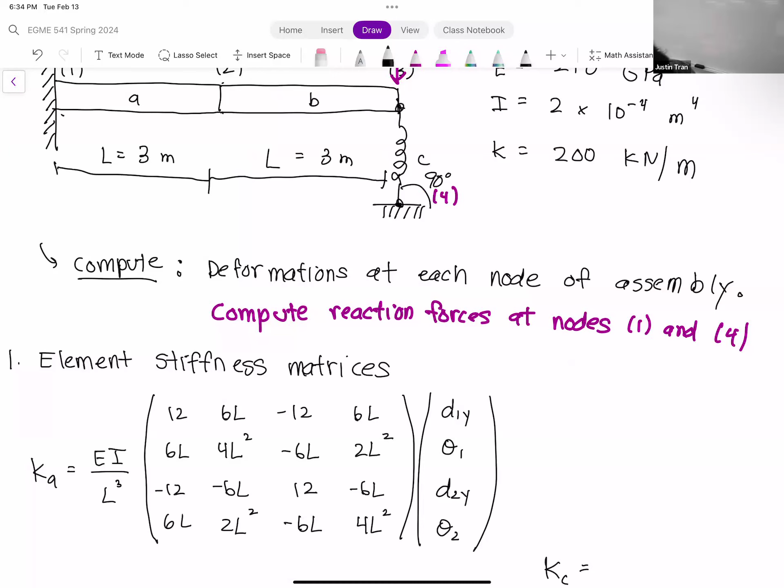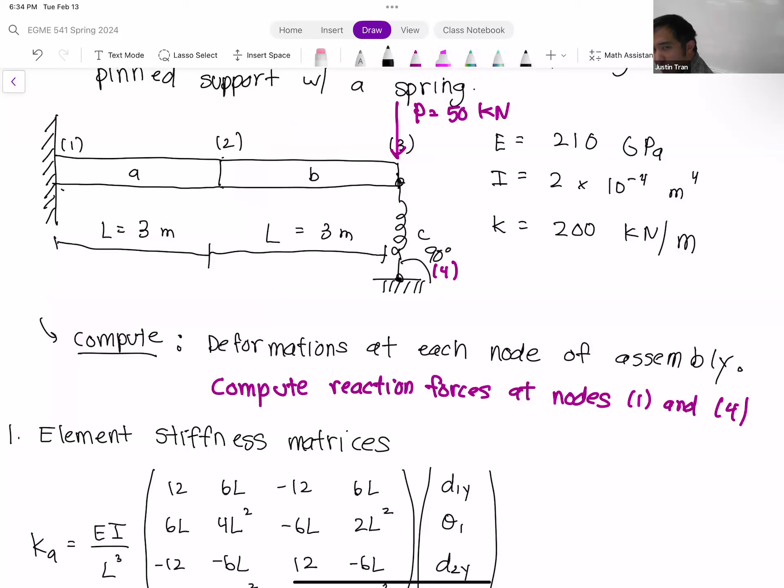So you can have your 4x4, 2D spring element stiffness matrix here. Or, one thing you can notice is that the spring can only deform in the Y direction, since it's limited to expansion and contraction. That just so happens to align with the transverse deformation of element B.

Let me write that down: the axial deformation of spring C perfectly aligns with the transverse deformation of element B.

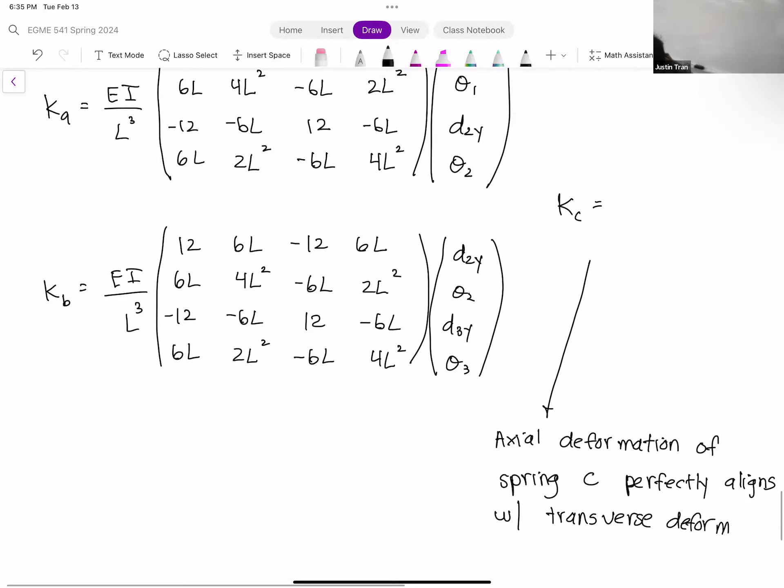So what does this mean? That means when spring C expands, that deformation is going to align perfectly with the transverse deformation of the beam. So this lets us simplify our element stiffness matrix.

Instead of doing a 4x4 for a perfectly 2D element, let me write our typical 1D spring element stiffness matrix. That's our 2x2: K, minus K, minus K, K.

And then for the degrees of freedom here, we're going to have D3Y and D4Y.

So we're going to save ourselves some writing and not even consider D3X and D4X, because in this case there's no way for us to achieve those deformations. If we were to do this by the books, treating it as a 2D spring, we'd have to include D3X and D4X—that's what gives us our 4x4 element stiffness matrix.

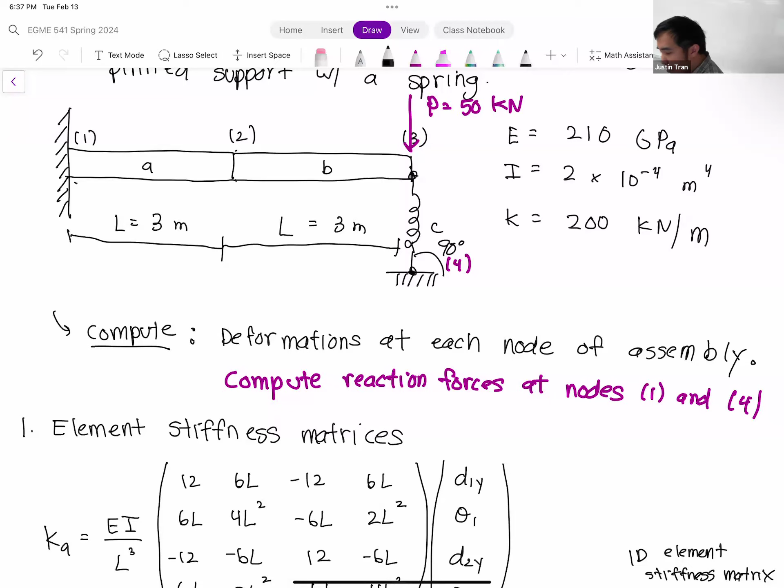But if we think about it, this spring can only go up and down, and beam B can only go up and down and rotate as well. So with the elements we've chosen for this structure, there's no way to actually obtain a deformation in the X direction. So we can just cut that out completely and use our 2x2 1D element stiffness matrix to save us some work.

If you did treat this as a 2D element and included D3X and D4X, that's perfectly fine—you're still going to get the same result, it's just going to take you a bit more work.

Any questions on how we obtained these? Okay, so let's assemble. I don't think we'll have time to finish everything today because I want to make sure I talk about the results, but let's assemble the global system first.

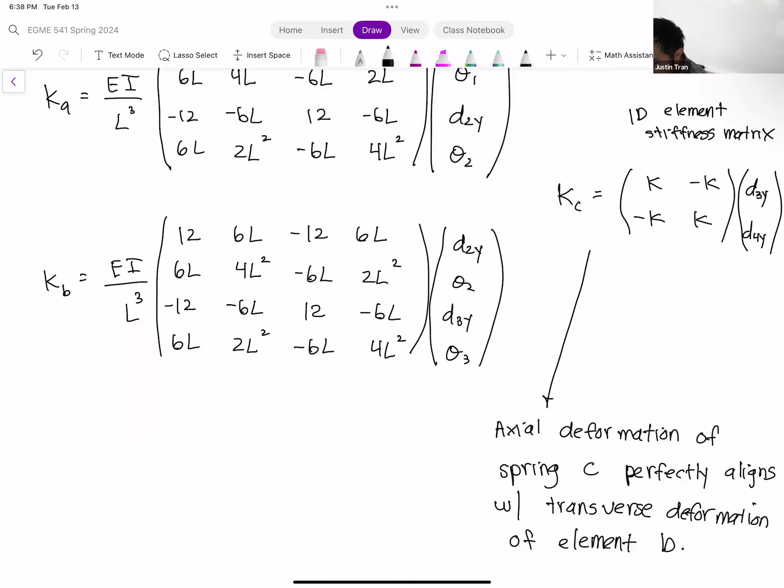Okay, so let's work on assembly here. We have quite a unique system because we technically have 4 nodes, but node 4 is only connected to a spring.

So that means node 4—because node 4 here is not connected to a beam—there's no need for us to include a row for theta 4.

So there's no need for theta 4 row. That means our global system will have nodes 1, 2, and 3, and all three will have transverse deformation as well as rotation. That gives us 6 degrees of freedom. Node 4 only has D4y, so our global stiffness matrix is actually going to be 7 by 7.

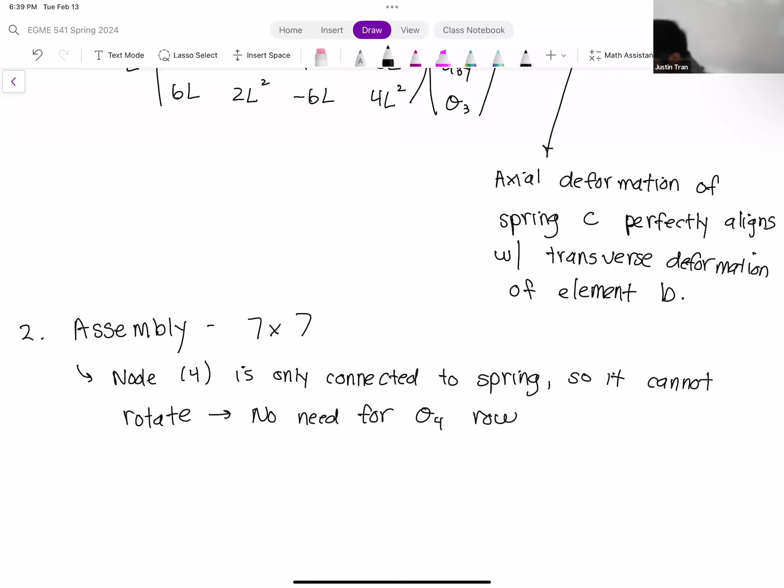Let's go ahead and write all those down. So you have F1y, M1, F2y, M2, F3y, M3, and then F4y - that's 7 rows. And then for columns we have D1y, theta 1, D2y, theta 2, D3y, theta 3, D4y.

Oh yes, sorry about that. Thank you. My mind is already thinking about dinner. You guys get the bad end of the straw because I do a lecture right before this, and I have to eat a really early lunch because I have a lecture around midday, so I'm always starving by the end of this lecture. If I make mistakes or seem dead, call me out on it - there's nothing like a little shame and embarrassment to whip you into shape temporarily.

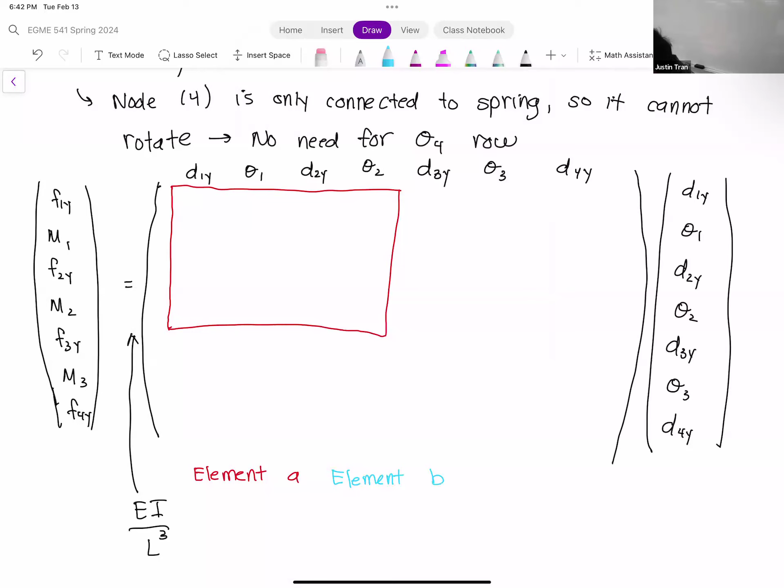Let's start with element A. Element A is connected to nodes 1 and 2, so it's going to be that upper left portion right there. Next we have element B, which is connected to nodes 2 and 3, so that's going to be this portion right here.

And then we have element C. Element C is the interesting one - it's our spring. It is connected to nodes 3 and 4, but remember, a spring does not support any rotation. So that means the places we insert it are D3y, D3y, D3y, D4y - both the cross terms - and then D4y, D4y. All those squares should be the same size. Make sure you skip theta 3 because the spring cannot support any rotation.

Okay, let's add these in. Starting with element A, we have 12, 6L, minus 12, 6L - same thing into the column. For the overlap portion, I'm just going to write that one in - this is the same as our first example. So we have a 24, 0, 0, 8L squared.

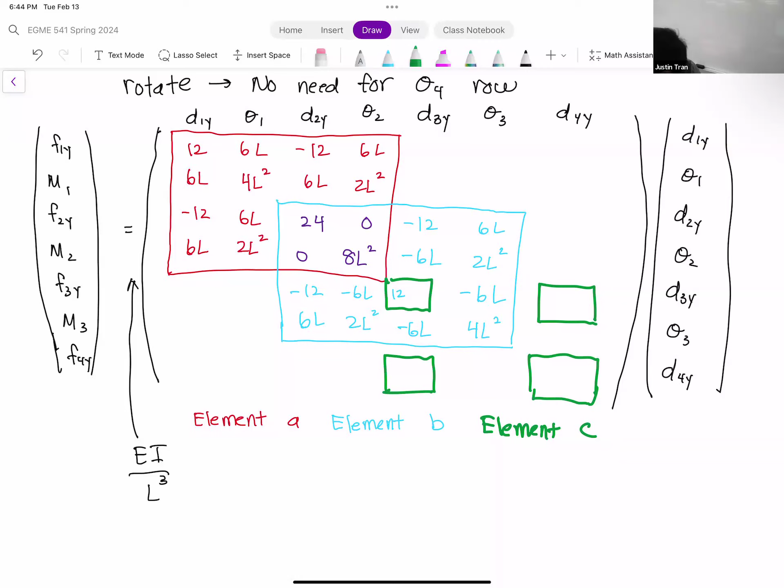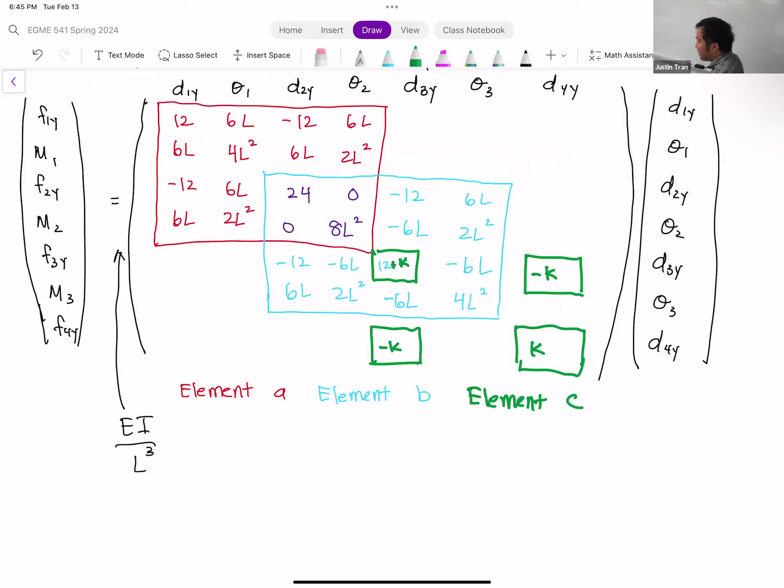The last thing here is we have to add in our spring. Our spring just consists of the spring constant K, right? So it's tempting to just write K - minus K, K, and plus K. It's tempting to do that because that's what we've always done. But remember, in doing the springs or beams, we have this factor EI over L cubed multiplying everything inside the matrix. So if we want those entries to be just K, we have to factor that out and multiply K by its inverse. So instead of just K, we're going to have plus K times L cubed divided by EI, and all these entries are going to have L cubed divided by EI - that's just to make sure the units are consistent with the original element stiffness matrices.

Any final questions on this before we wrap it up for today? Okay, we'll pick this up on Thursday. I'll go over that spring constant thing one more time - that's just to make the units consistent - but we'll pick it up with that, finish up this problem, apply the boundary conditions, get our solution, and then compute the reaction forces.